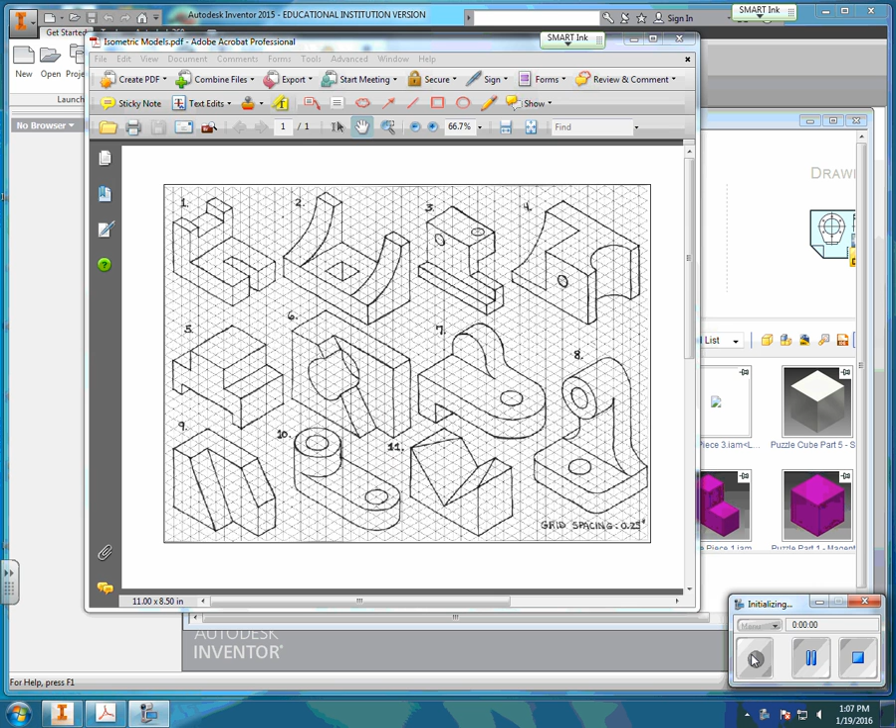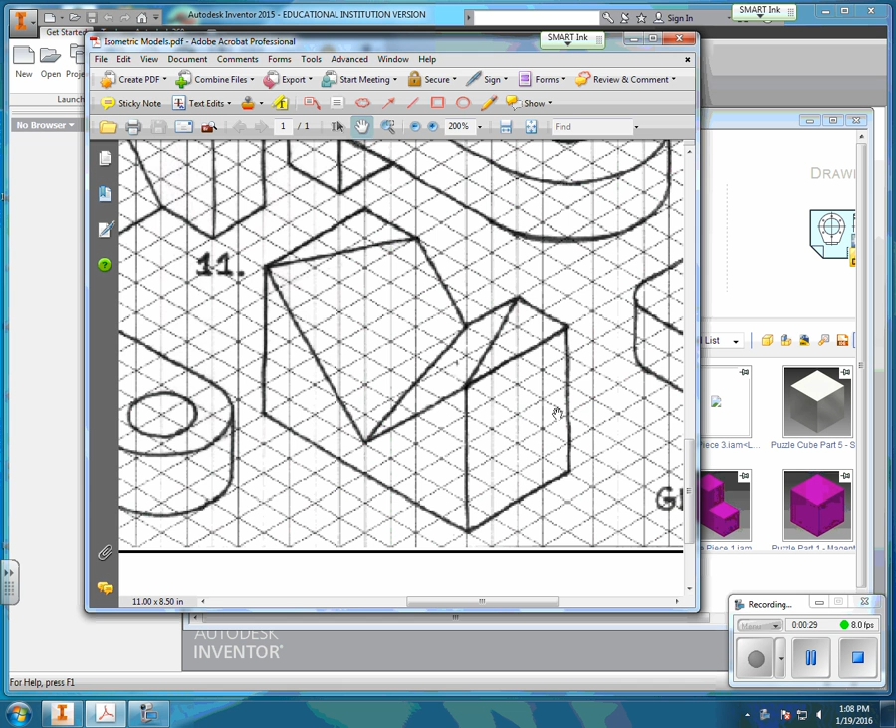For this tutorial, we'll be working on isometric model 11. It is right here. Let me zoom in for you. Right there, and there's model 11. And what we're going to see from model 11 is that it looks like it's a block with a triangle that is cut out from it. So it looks like we should be able to do a subtractive modeling method with this part, and I'll show you how to do that on Inventor.

So we'll start by creating a new part. Now once the part has opened, I'm going to go ahead and start a 2D sketch. And here I'm going to start it on the XZ plane. That way I'm going to take the front of that isometric model and sketch that out. So once I get that, I'm going to go back to my part. And what I can see from the front of this isometric model is that I have a block.

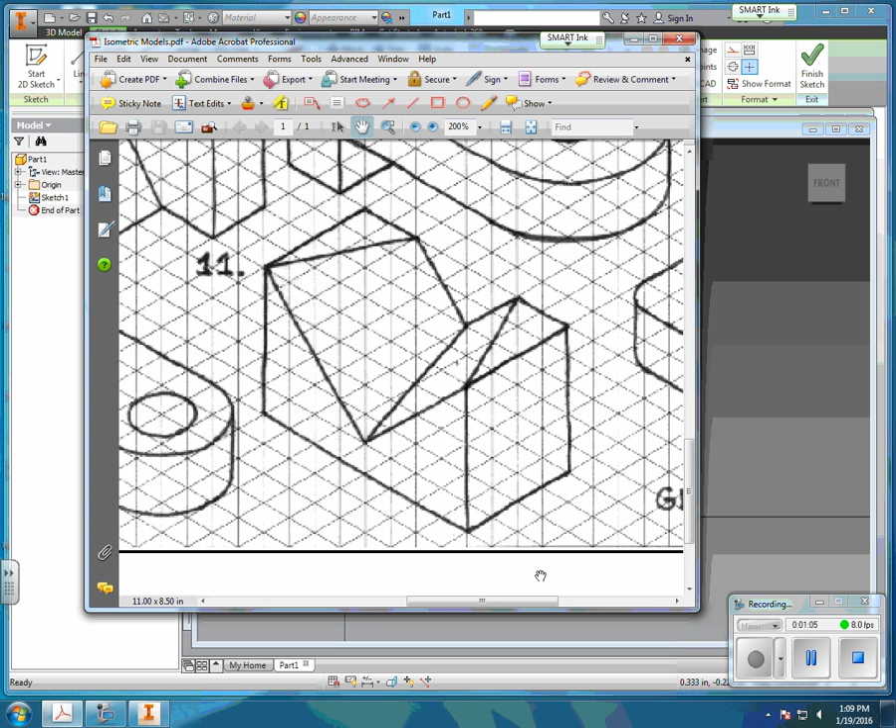And if I count the amount of spaces, it looks like there's 8 spaces. My grid space is at 0.25 per grid space. That would give me the length of 2. And the height has 5 grid spaces, so that would be 1.25. So I'm going to go back here, create a rectangle, lock it at my 0, 0. And I can just go ahead and drop that.

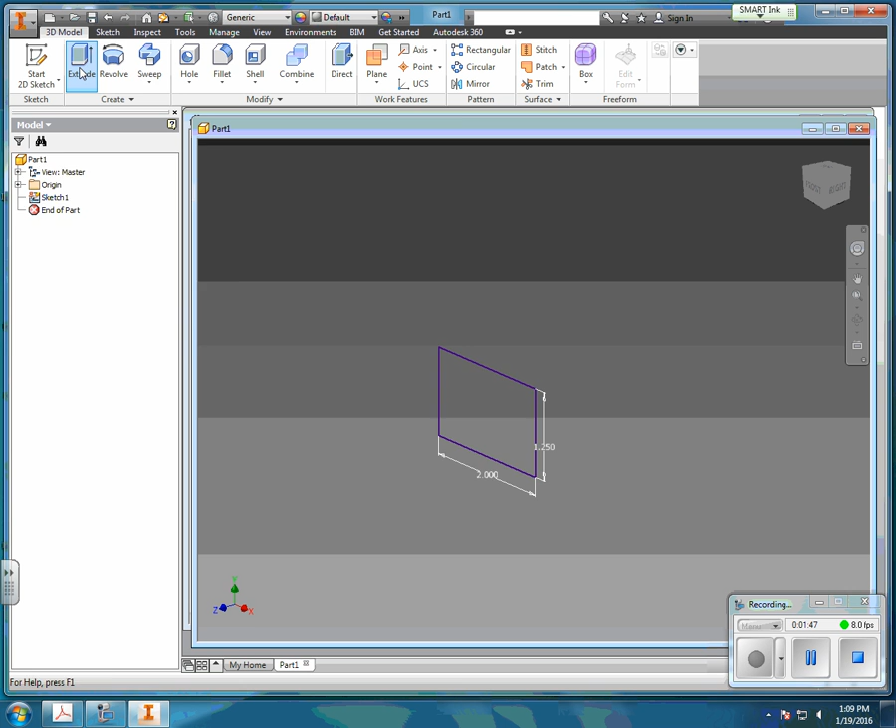So I'm going to use my dimension tool to constrain it. Click on this line and I am going to dimension that to 2, as we had discovered on that drawing, and my height is going to be 1.25. And after I'm done with this, I'm going to finish my sketch. Then I'm going to hit the extrude feature, and I'm going to click on it. For me, I like to bring the direction towards the back, but you can choose the forward, back, or in between. I just have a personal preference to bring it to the back.

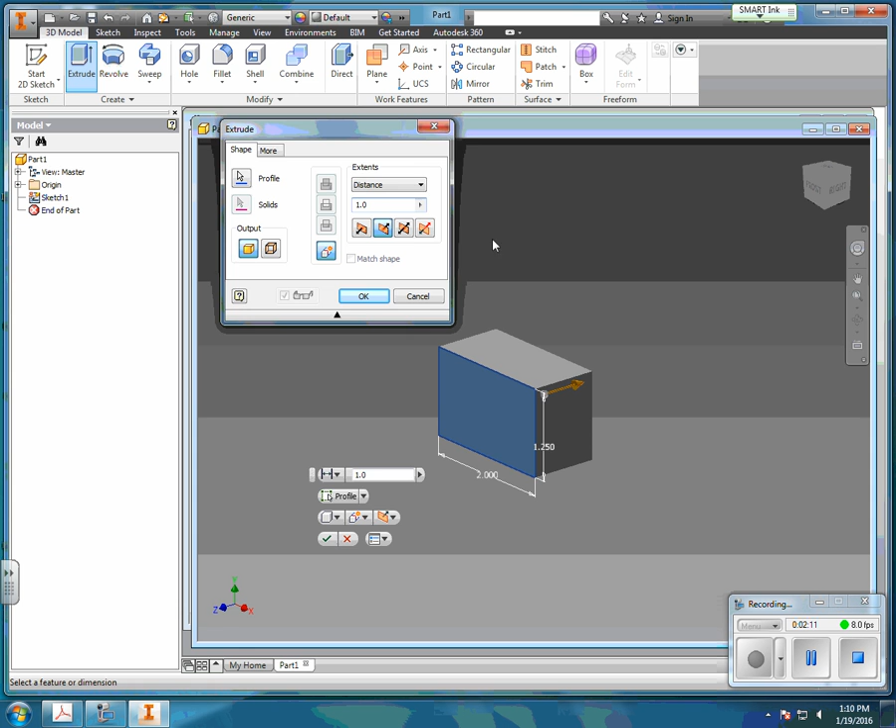Now looking at my drawing, it looks like my depth is at 1. So lucky for us, it's already default at 1. If yours is not default at 1, go ahead and type that in and hit OK. Now I have the block, but I also have those 2 triangles that need to be cut out. Normally, if it was the same size triangle cut through, we could do an extrude feature, but because the triangles are different sizes, we're going to be using a new feature called loft. I'll show you how to do that.

I'm going to look at my front part of the shape. I'm going to create a 2D sketch on the front. Now what I'm going to do is create this triangle. Let's see if you can see that. So it looks like if I connect from here to here and drop the triangle down, I will have a triangle on the front view. So I am going to go ahead and first create that line at top, draw this part of the triangle, and try to line it up to the midpoint of this line.

So you see here I have created a triangle, but what I need to do is constrain these lines, and I can do that through the dimension feature. So I'm going to go back to the drawing, and we'll see that the point of this triangle is at 0.25 away from this edge. So I'm going to lock that in, click on here, dimension this, 0.25. It's already dimensioned there. You notice how my lines turned to blue. So I'm going to go from the edge.

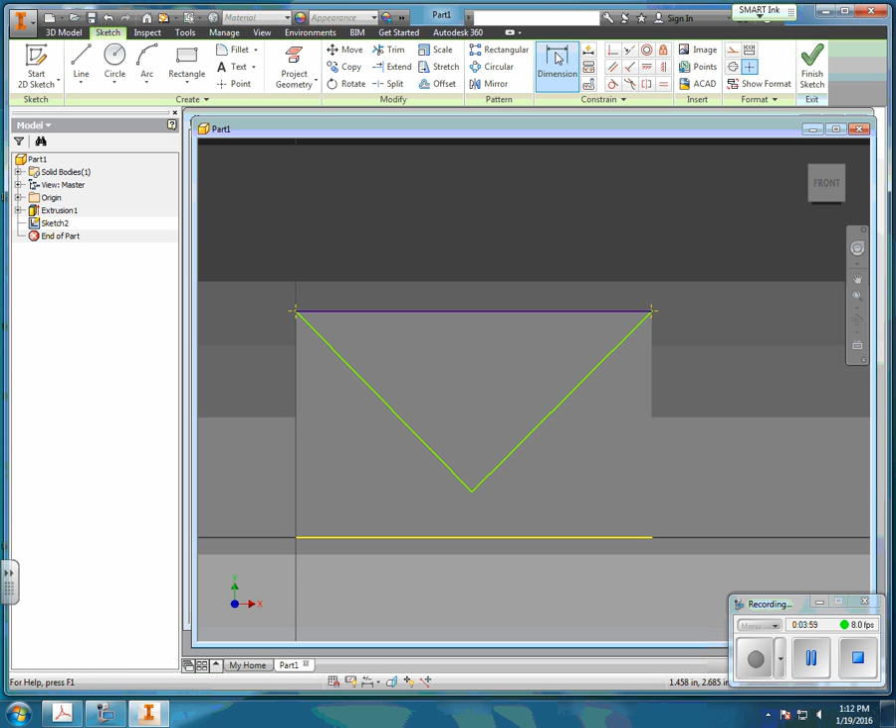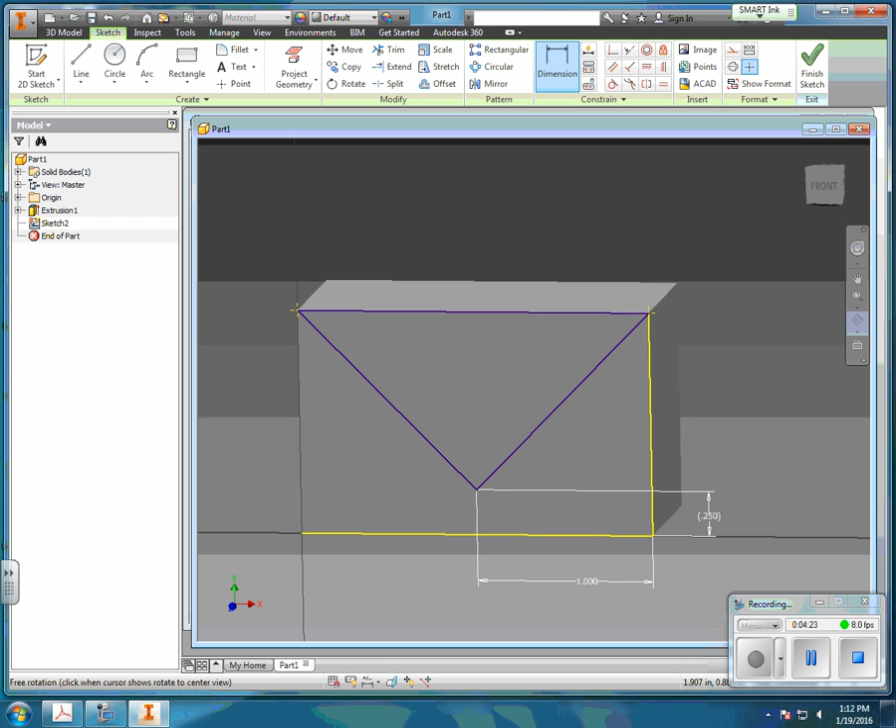I'm going to make sure that I locked this, and I didn't. I want to make sure that I locked it to the center, and for some reason it is not letting me lock that. So let me go ahead and just lock that at 1, and I'll center it. So here it looks like what I had to do was delete that dimension because it didn't dimension it, and lock it at 1 away from the edge and 0.25 away from the bottom line. If you have issues with dimensioning yours, you could go ahead and delete the dimension as you saw that I did and redimension it to get these constrained. When I'm done with this, I'm going to finish sketch.

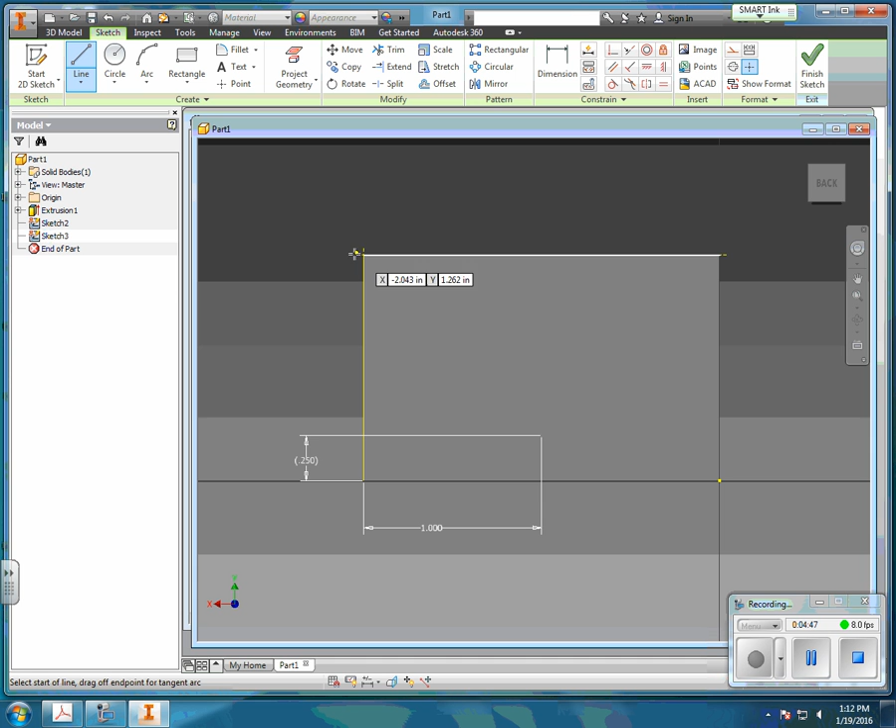And now what I'm going to do is sketch on the back of this block. And this time I'm going to sketch this little triangle here. So I'm going to go ahead and draw. Now the triangle doesn't end at the corner, it actually comes a little bit to the edge. I'll try to lock that towards the center, but it does go a little higher, so I'm going to go there and close my triangle. Not worried that it's not even, because I can always come in and dimension and constrain that. So I'm going to constrain that.

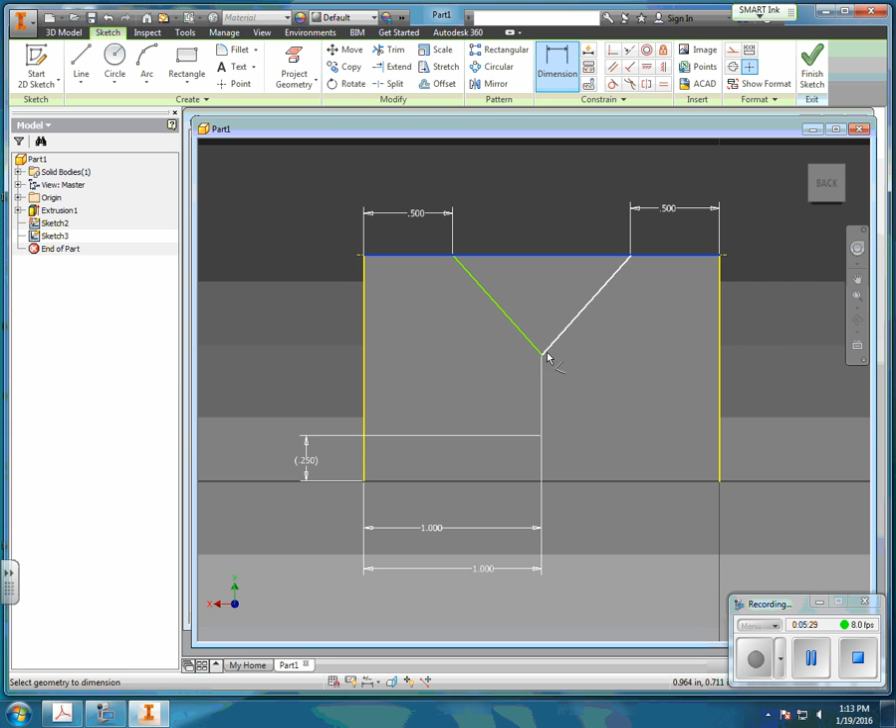Again, it's at the midpoint, so I'm going to lock that at 1. I also can tell from my drawing that this is at 0.5 from the edge. So I'm going to dimension this to here, which is going to be 0.5. You'll see that my line has shifted. And now I just need to constrain this distance, which I have to revisit to see that it is 0.5 from the top. Right now it gives me 0.5509699. Just go ahead and constrain that to 0.5. Once I've completed that, I have 2 sketches and no 3D command.

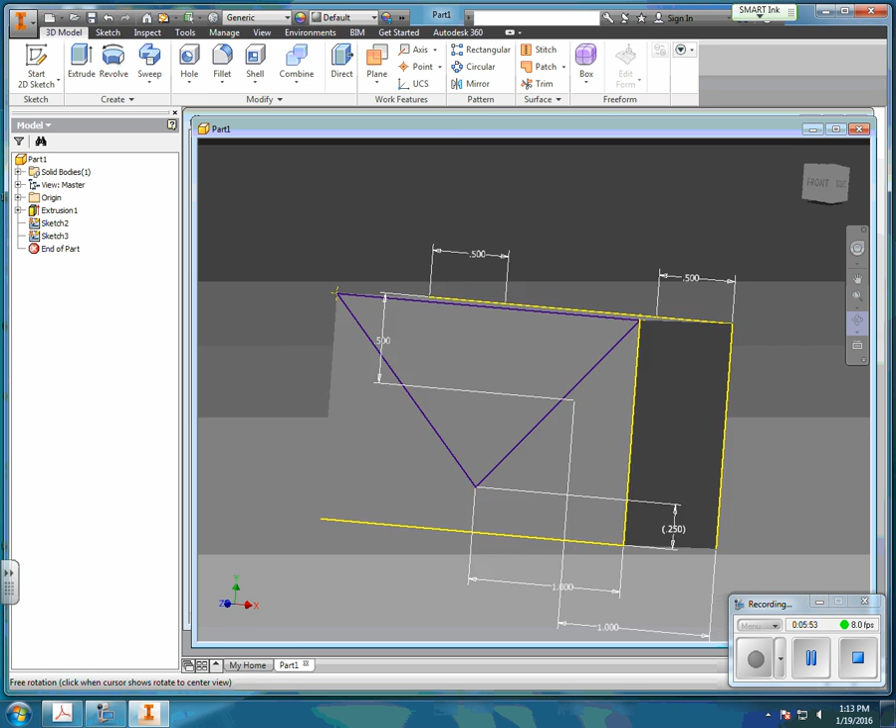So this is where we're going to tell Inventor to loft these 2 sketches. I'm going to go up to Sweep. That's where the loft feature is hidden. I'm going to click to add. Click on Sketch 2, and I'm going to make sure that I clicked on the triangle. It'll highlight it. You don't want the other part, you want the triangle. I'm going to go to Click to Add and hit Sketch 3. Again, I want to highlight the triangle. It looks like it automatically did it for me.

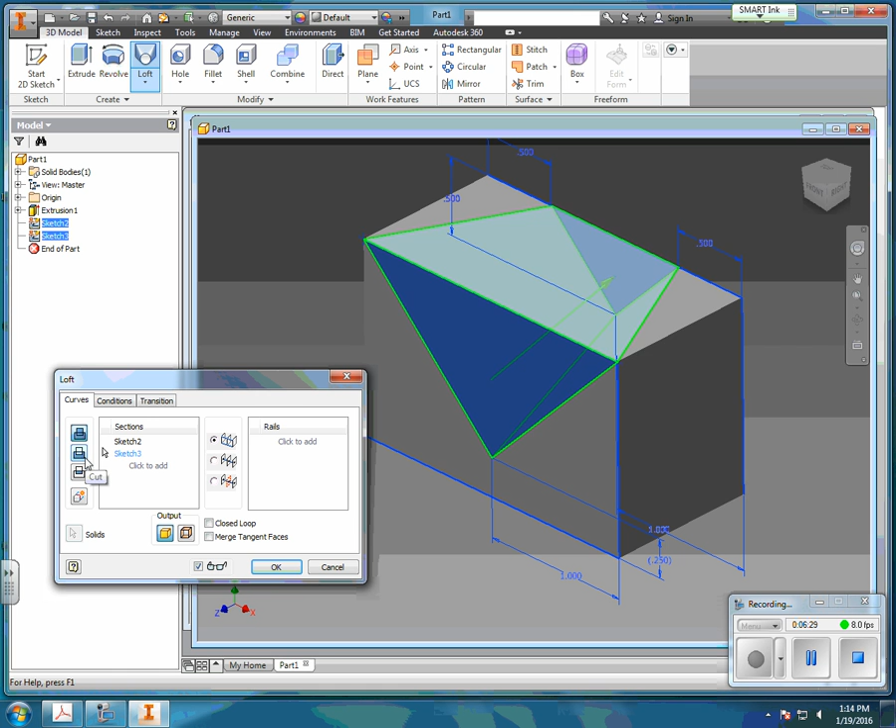Then I'm going to go to Loft Cut. Loft Join actually lets you make the part if it were 2 different shapes, but what we want to do is subtract that part away from it. So I'm going to hit OK. And there you go. There's your shape. Let's go to the front isometric view. And here's your part, isometric model number 11.